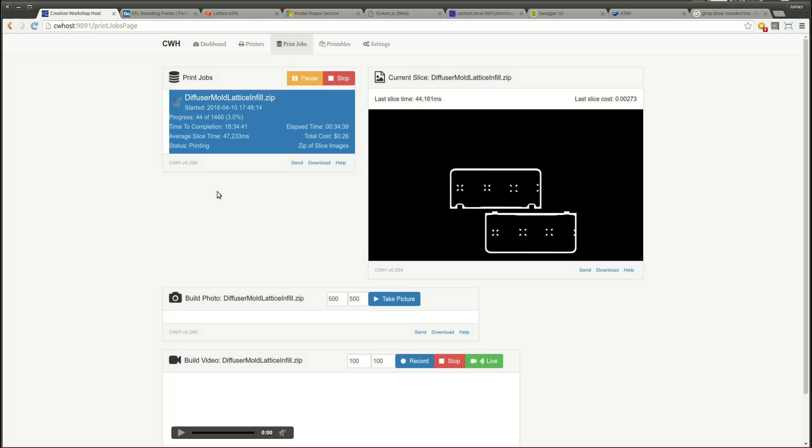I've got prototype molds printing on my Kudo3D Titan 1 being controlled by Photonic3D, formerly known as Creation Workshop Host. That's going on right now, but what I really want to show you today is the process by which we take a set of models, for instance this mold here, and we get it ready to print using Photonic3D.

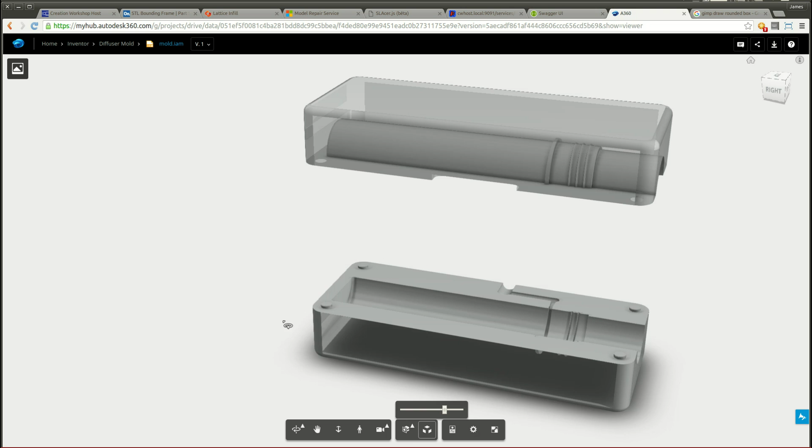So let's start. We've got this model, right? And I modeled this in Autodesk Inventor. You could have modeled this any number of different ways. And this is a two-part mold. There's a core and a cavity. And you export each part separately as an STL file.

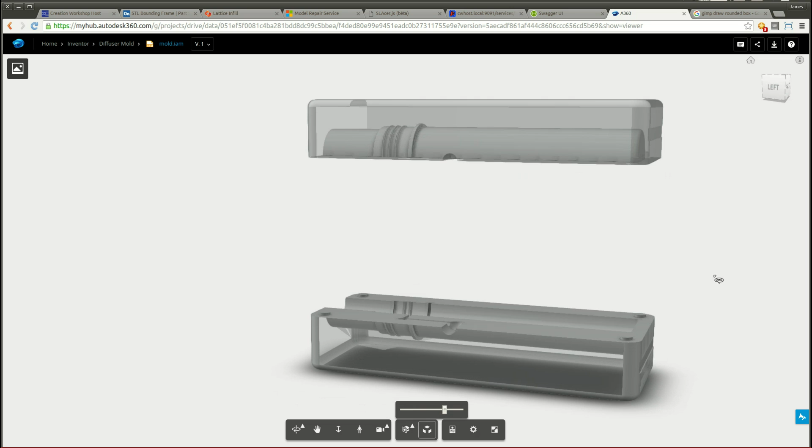Now the big problem when we get into SLA printing, or resin printing, is that we need to hollow out these models, and we've got to put drain holes in them, and then there may be overhangs and things that we have to worry about once we hollow out the model. So how do I do that?

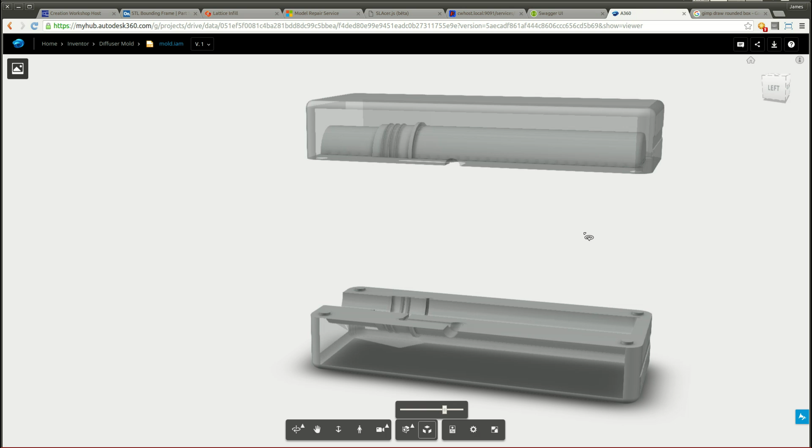Well, the main reason why we want to hollow out and put drain holes in and air holes in is to reduce the surface area so that the model doesn't stick to the vat while we print, and to save some resin. Saving resin should be pretty clear. Same reason on FDM printing we use sparse infill, but the suction forces are important to think about, right?

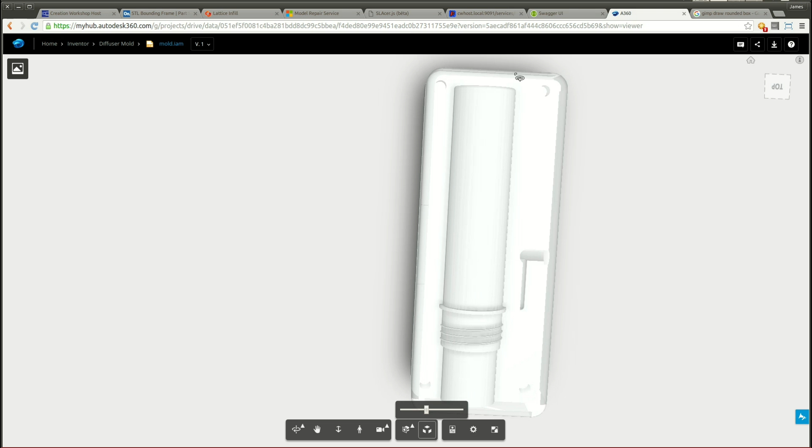I'm going to eventually, when I print, I'm going to be printing with this end here against the build plate, and that means the model is going to be built starting with this part up here, and then layer by layer the build plate will go up and down, right? You can see lots of my other videos that show the build process.

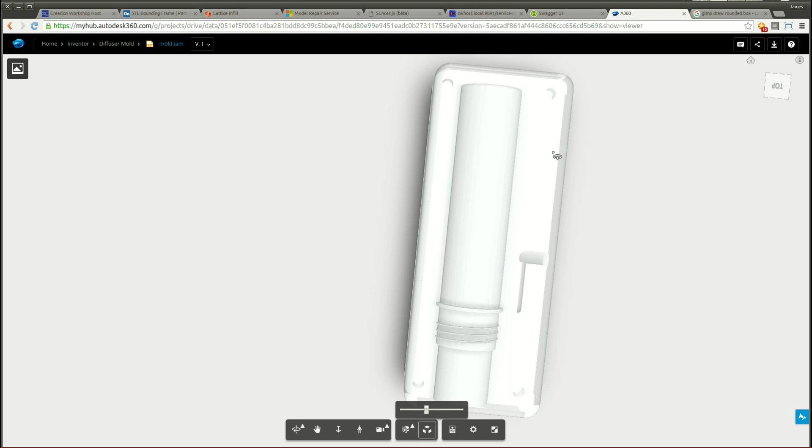Now in the middle of the build process, there is this void on the inside, and besides the stickiness of the resin itself and the solid parts, you also have to worry about this whole void forming kind of like a big suction cup against the bottom of the vat. And that is going to happen if this top part here is solid.

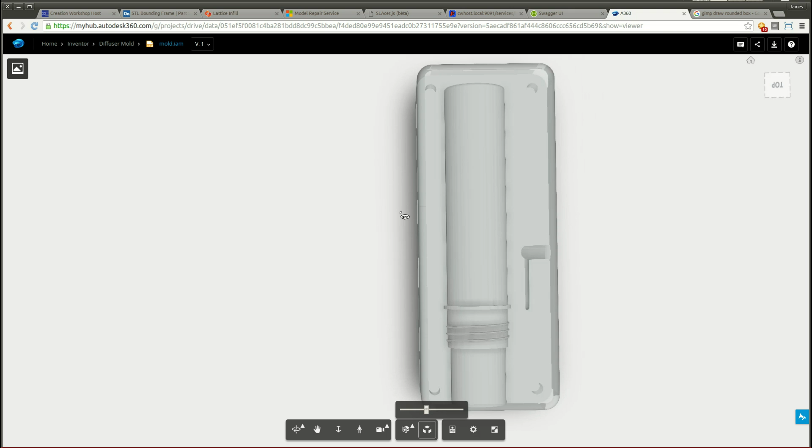So what we need is an air hole so that when this part goes up during printing, there isn't going to be a suction cup effect from the void. And we're going to do that with drain holes and a vent.

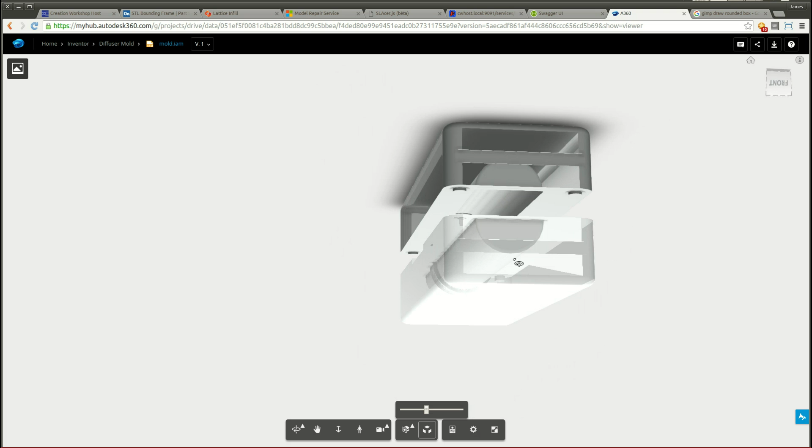And I've had to model the vent into this part already. That's this slice here. And this will create an air channel out the sides, and then I'm going to put holes in here using the infill tool. That way there will be a continuous air path from the interior of the model outside across this bit here.

And then out. So we start with this model, and then we use this Lattice Infill tool that Autodesk has on as one of their experiments.

A few weeks ago, if you've noticed, the buzz was Autodesk had this video and a set of, I think there was a blog article somewhere, talking about how to make prints go super fast on the Autodesk Ember. And one of the ways they make prints go super fast is to...

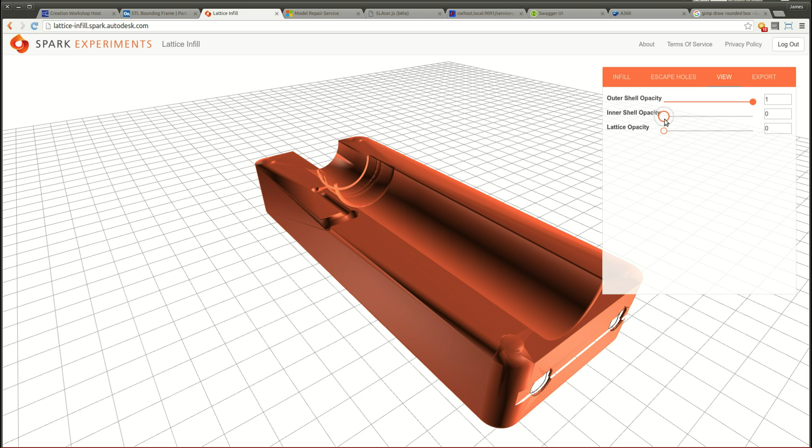...sparsely fill it, and then take advantage of this tool here to put in holes. So there's drain holes here, and if I increase the lattice opacity, you see that there's a lattice on the inside. So I use this tool here, which is web-based, in order to produce this part.

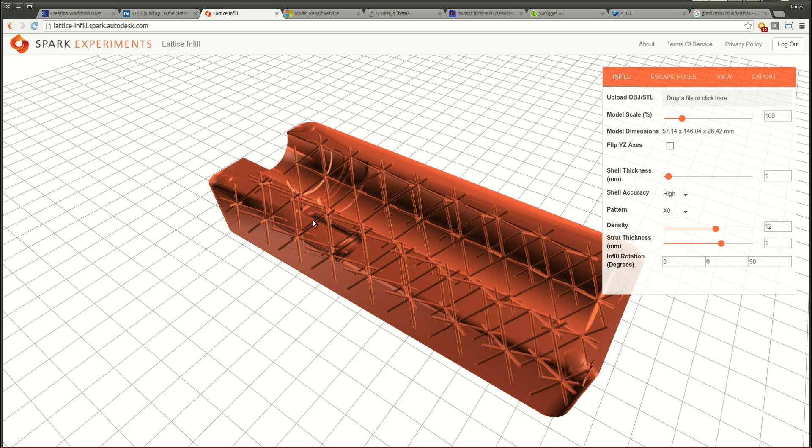Now, how does this go? Let me refresh this now, take it back to its original state, and then let's go through that process very briefly. Now after refreshing, this brings us into the default settings for Lattice Infill. Now in my case, I don't need a 3mm shell.

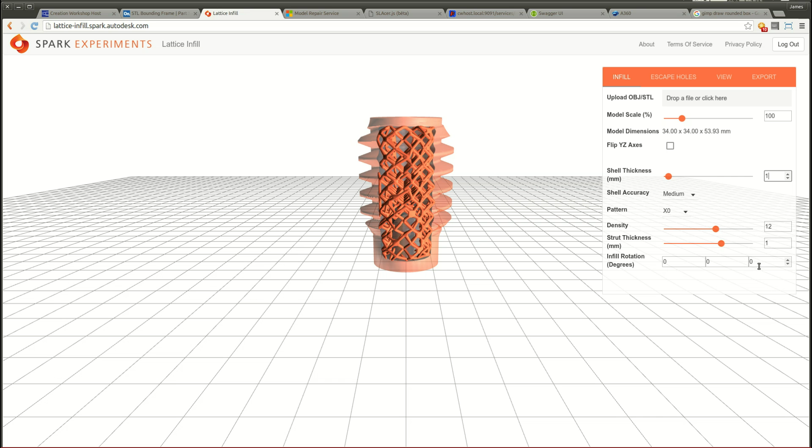I only want a 1mm shell, and I'm going to leave the rest set like this for now. There's this default screw part here, and I'm going to go and pick my own. I'm going to pick this diffuser mold core, load it, and then take a look at how this goes.

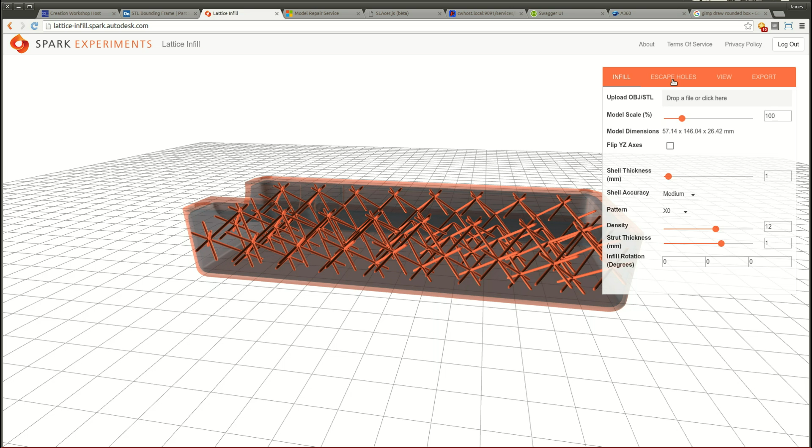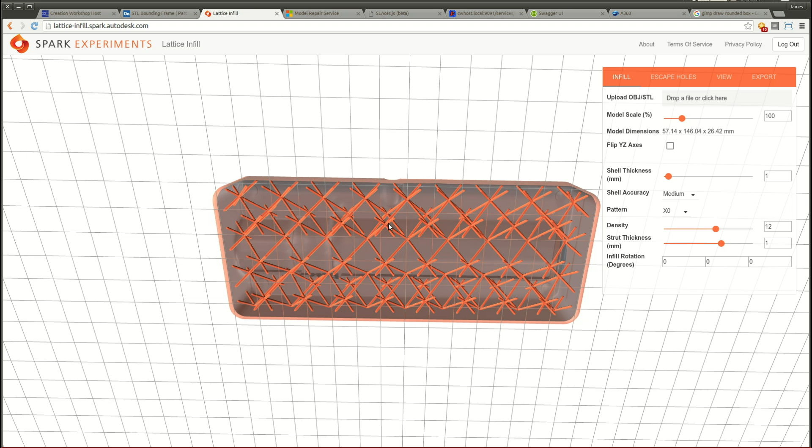Now, the orientation of the part really matters, because this tool only likes to make escape holes against surface planes that are normal to the bottom. And what that means is that it's really hard. In general, I won't easily be able to make drain holes down here, a whole bunch of spots. The tool will complain, just giving an error saying unable to create drain hole.

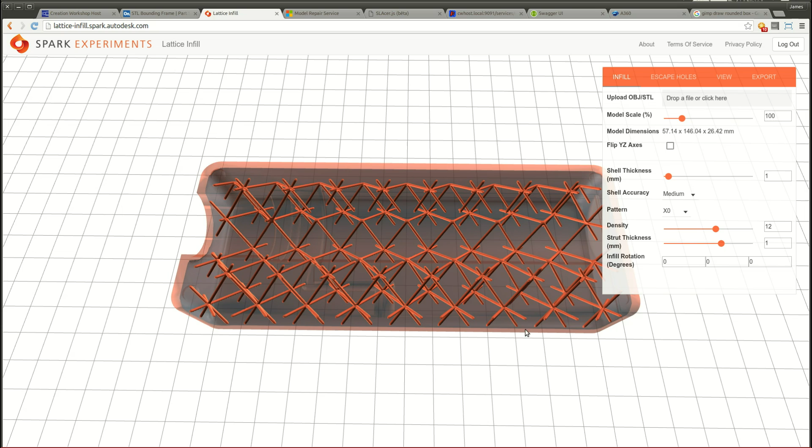You really can only easily create drain holes on the sides in the current version of the product. So I've brought in this model flat, which is the default way that it exported. It does mean, though, that we want to plate this thing afterwards. I'm not going to print it in this orientation against the print bed, but I am going to process it. Because it's oriented this way, the infill may not be optimal for going top down, so I'm going to change the infill rotation a bit, since I'll be printing it upright. Change the infill rotation by 90 degrees, and we're just about set.

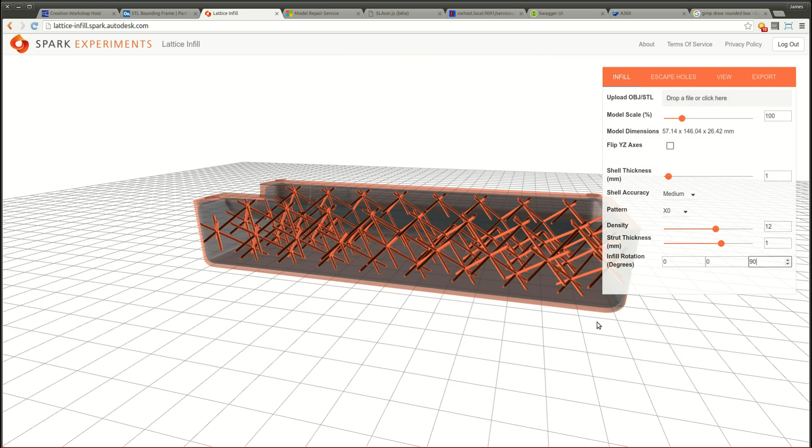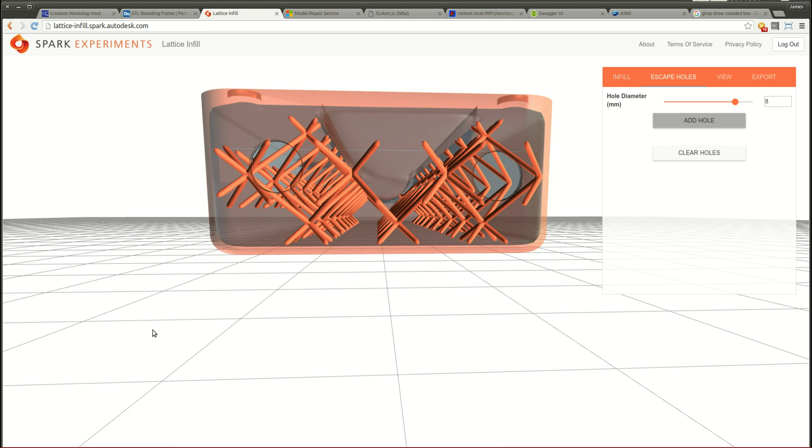The only thing I need to do now is the drain holes. Now remember, if I pull this over to the side here, you'll see there's a cutout here, which was for my air vent. Now I want to put in 2 holes that'll align with those air vents. So I go to escape holes, make my hole diameter 8, and then go add hole. This hole tool conveniently shows me the normal, and I'm going to put one here, and one here. Now these holes overlap with this channel, and that'll create a continuous air channel that goes from the inside out through the holes, and then out through those channels. Now we're set.

I'm going to export this now, export the mesh, and this is going to come out as an OBJ file. The OBJ file that this thing saves could have, and usually does have, non-manifold geometry in it that is going to mess up the slicer.

So I did this on both of the parts, and then I came over to Cloud Netfabb. This is the ever famous cloud version of Netfabb. You can go to cloud.netfabb.com or here, which will redirect you to netfabb.azurewebsites.net. This is a cloud version of Netfabb that only does 3D print fixing. You basically come here, go upload, and select the part, and this thing will take OBJ files. Remember, we imported an STL file, but the Autodesk tool likes exports OBJ files for whatever reason. So we're now in kind of OBJ file land, but that's no problem.

I can come in to where I saved my model and pick up my OBJ file. This is the infill OBJ file that I had, and then I'll upload it, and it'll repair and download. This takes a bit of time, so I've done that already, and we now have the fixed OBJ files downloaded. Once I have the fixed OBJ files downloaded, I then need to lay them out.

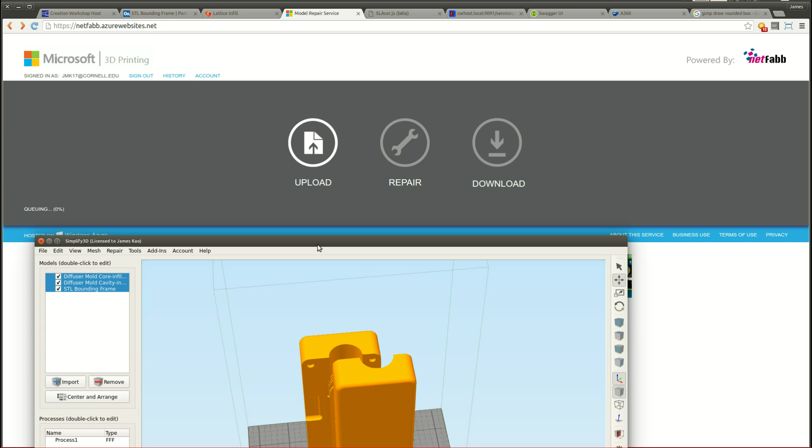You can use a number of different tools for it. Simplify3D is pretty nice, I use that. It is a paid tool, so you can also use Cura, which I'll show you here. Setting this up is relatively simple. You're going to have to add a new machine, and none of these settings matter because we're not actually going to print with this. What really matters is just setting the dimensions of the bed, the X, the Y, and the Z height, so that you know your part will fit, and so you can lay out the part relative to the print bed.

So 168 by 94 by 250, and this corresponds to my current settings approximately. So I am going to load the model, and then I'm going to pick, say, my 2 fixed infills, which are in the form of OBJ files, and then I'll open those, and they'll come in.

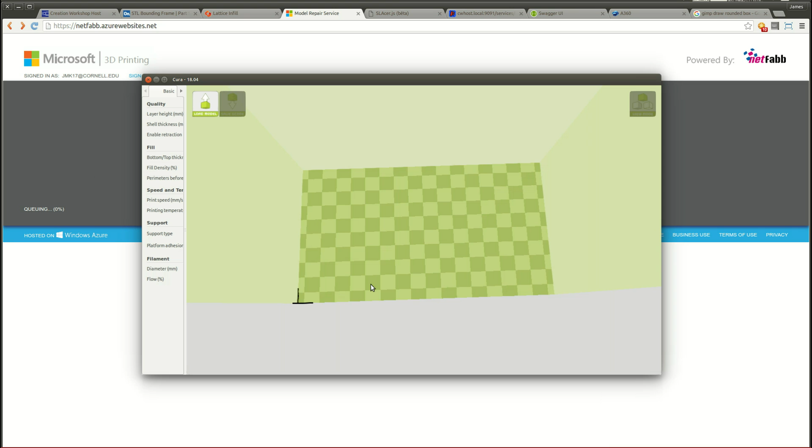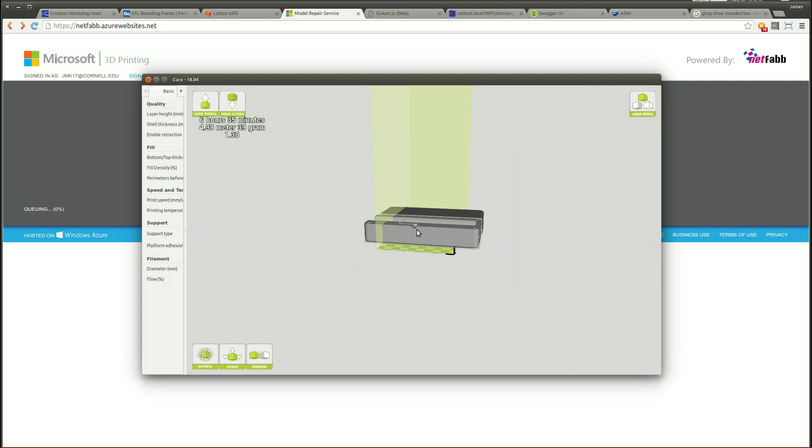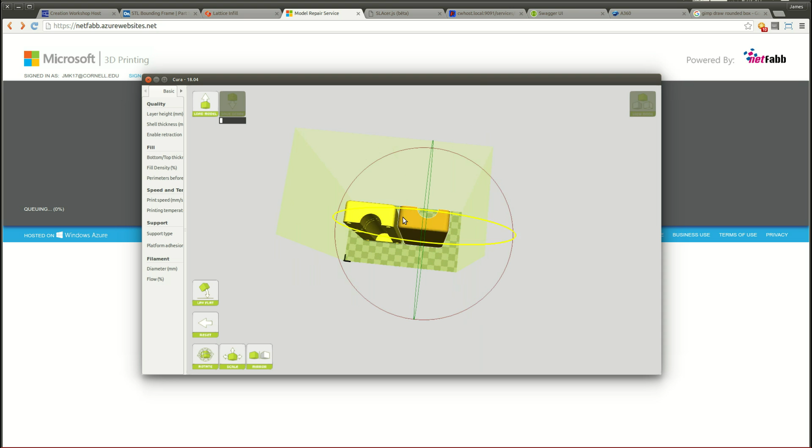Now I'm going to have to edit these, and do a couple of operations. I'm obviously going to have to rotate these in order to line them up properly, because it's not going to be able to print like this. So I'll rotate this guy here 90 degrees, and I'm going to rotate this guy here 90 degrees. And that's good, the holes are at the bottom where I want them, and then I can kind of move them around and they stick to the print bed or whatever.

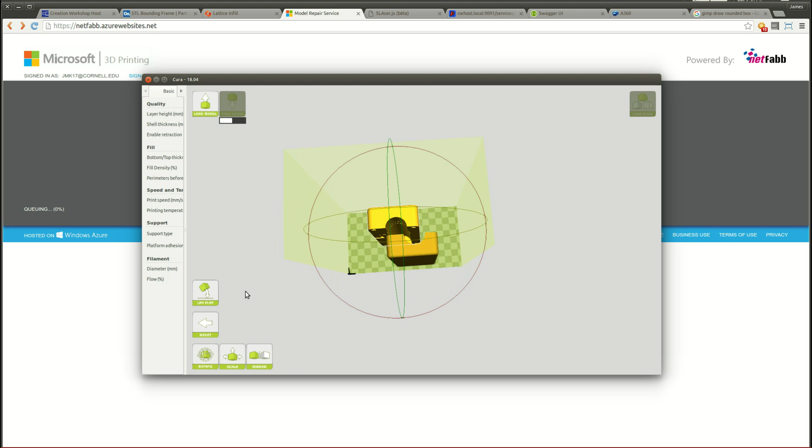But there's going to be an issue. And the issue here is that when I export this bed setup, my positioning isn't going to be saved, in that the model of the bed isn't going to get exported along with this.

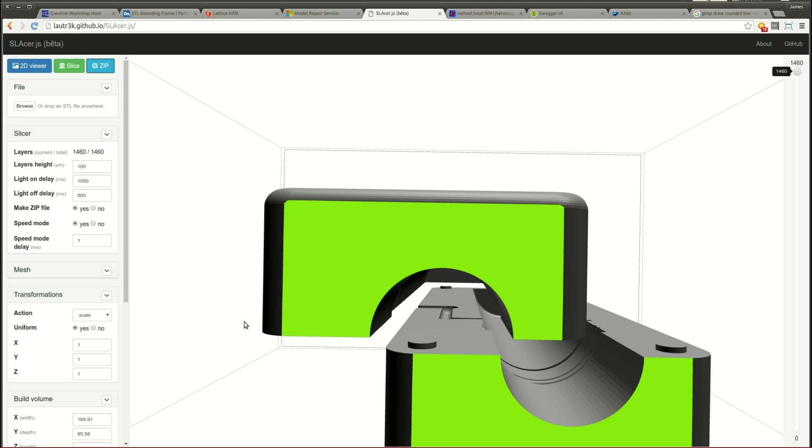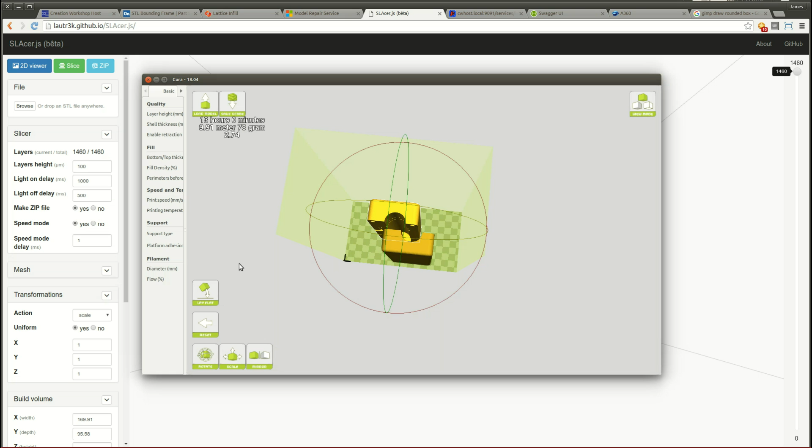That means the center of this whole dimension is what's going to end up getting centered when I take it to SLAcer to slice it later. The slicing tools I'm going to use online don't have the ability to move the XY dimensions or select the XY location or do XY translation of these models. So I'm not going to be able to control exactly where on the print bed this fits. It looks like I've chosen where it sits, but in reality the center of this combined model is going to go to the center of the print bed unless I do something. In this case, I need to make something that's going to frame the dimensions of this print bed so it'll center properly.

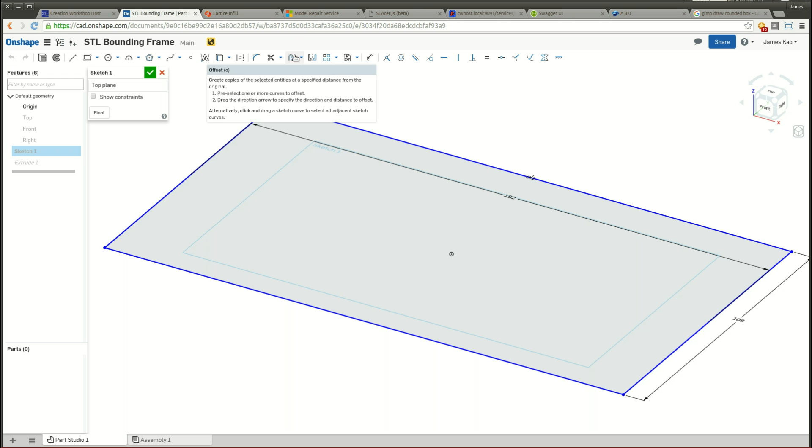That's what this STL bounding frame is. I modeled this very quickly in OnShape, an online tool that's free for non-commercial use. Essentially, I modeled out an object that's the maximum dimensions of my print bed, which in this case is 192 by 108 millimeters because I've got a 1920 by 1080 projector. I modeled out 192 by 108, made a rectangle, and used the offset tool to offset it by a really small amount, 0.5 millimeters. Then I extruded it, only by 0.01 millimeters, only 10 microns.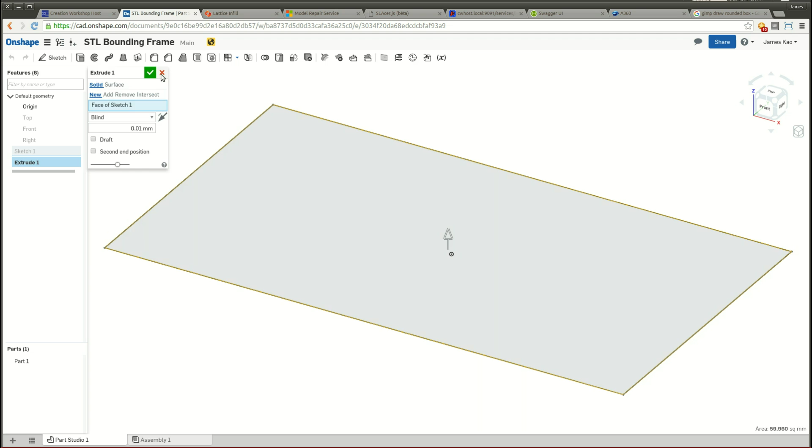What I want here is for this frame to not actually print. I want it to force the slicer to lay things out relative to this largest XY component, but I don't want it to print out. I just need this to bound the dimensions of the exported STL file and properly position the parts relative to the print bed. So this frame kind of represents the print bed, and I need to add it. I exported it - you go export, and then you can export this as an STL file.

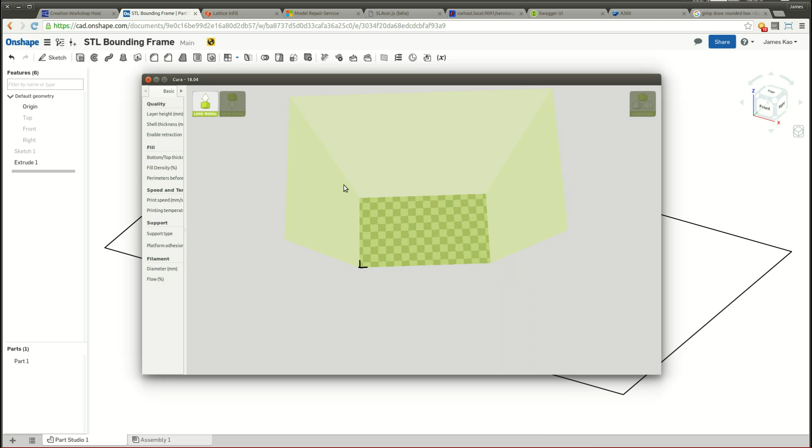Since that STL frame is really tiny, I'm not going to be able to select it easily here. So instead, I'm going to load it first and set it up here, and it's going to be centered by default. You'll notice it's actually outside of the build area, which is totally fine. Next, I'll load my other two models, my fixed OBJ files that came from Netfabb.

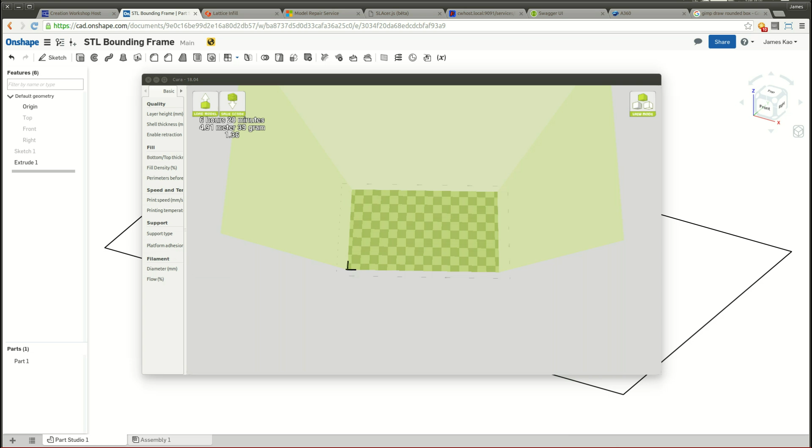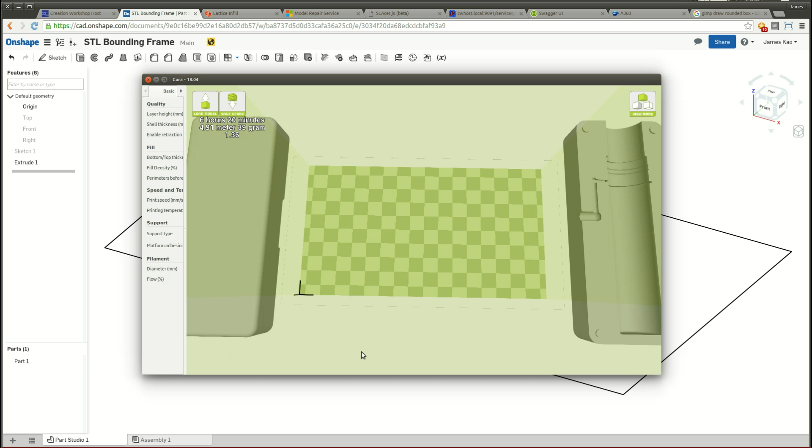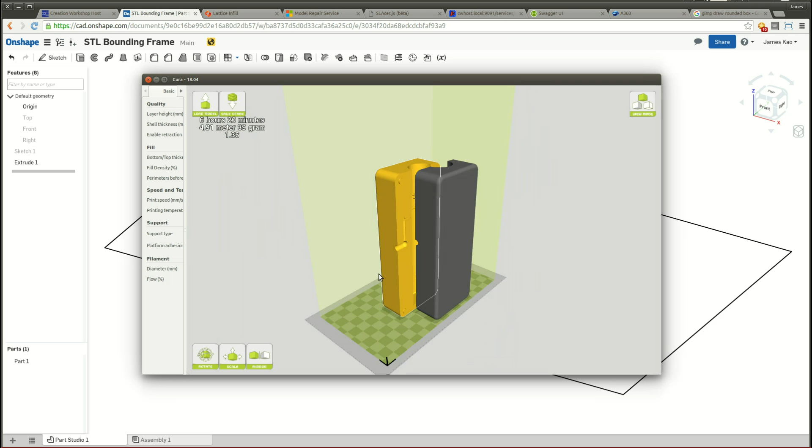Those kind of displaced the original guy, so let me go and reset all object positions, and now these guys go back to some default orientation. I'm not sure what they're resetting it to, but the important thing is it jumped this back to the center. Now I can come and do the rotations to get this guy rotated where I want it to. So now I've got these rotated and laid out where I want them. I've got the drain holes pointing down, the vents pointing down. These guys are placed in the most in-focus and brightest part of my projector.

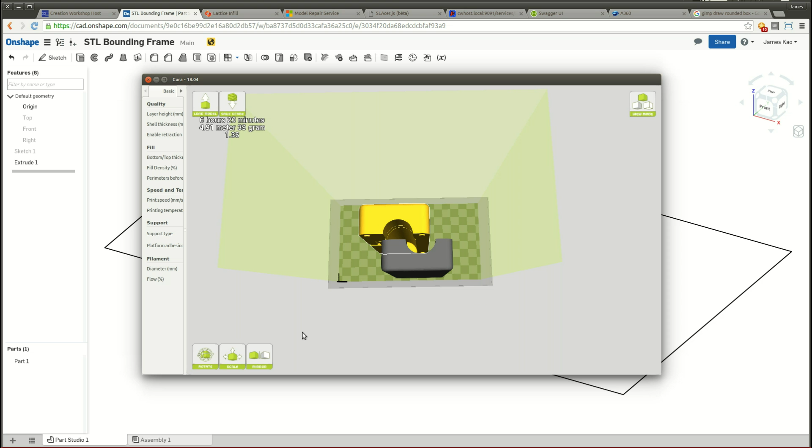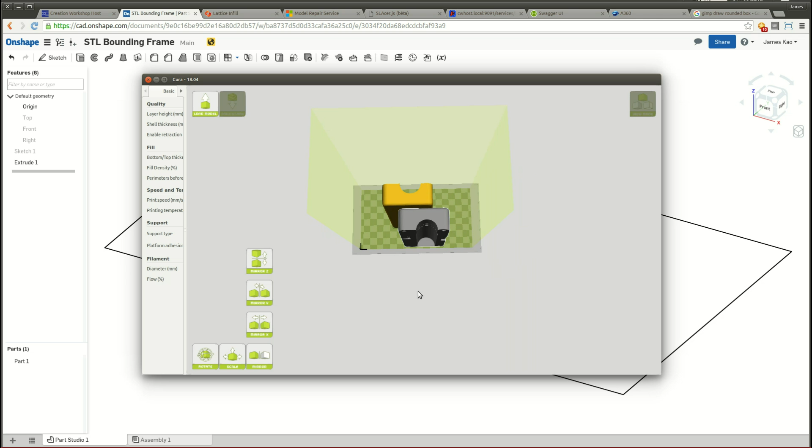Now the last thing I need to do is mirror these parts. You remember in Creation Workshop, you often need to do this, like mirror X-axis, mirror Y-axis if you're doing bottom-up, and we need to do the mirroring also. We're not going to mirror the whole image because we can't do that. Instead, I'm going to mirror the parts individually in 3 dimensions. I'm going to mirror that guy Y, I'm going to mirror this guy Y. That actually changes their orientation.

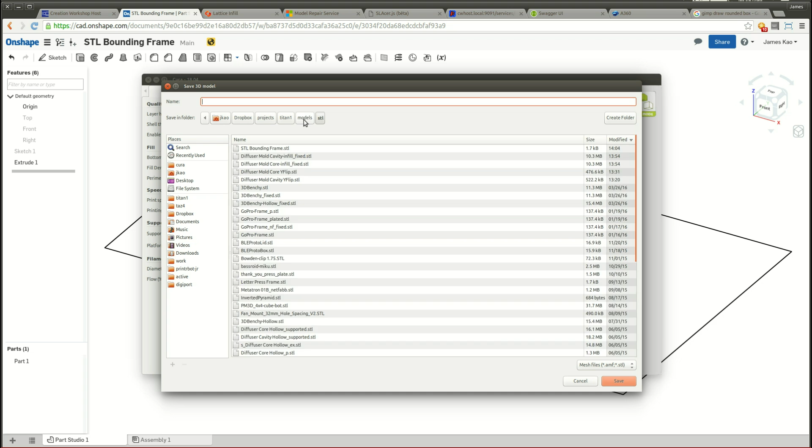So fine, I'll move these around so they get back into their location. I can mess around with this a bit, get it into the location I want, and then save the model. I'll save as - this will be the whole scene, which has got Y flip, it's infilled, and I did it in Cura. So I'll go replace that, that'll save it. If we zoom into the model here, you can see the infill.

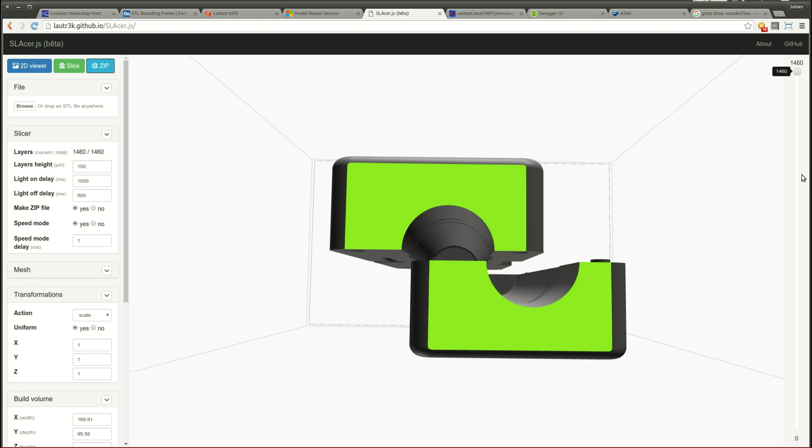So now we've got our scene all set up to slice. We're using SLAcer.js, a pretty cool project that's a pretty fast web tool I'm going to use to slice this scene. You'll notice that when I imported this, these two guys didn't jump to the center - they came in and were correctly aligned. I'll go to Browse and open up the scene that I have, and pull this up - these guys are in the correct location.

Now, there are a couple of parameters that you're going to need in order for this to slice properly. In particular, you need to set the build volume here, because this is going to set the dimensions of your build, right? Which is this inner box here. This outer line here, this is the outside of the frame kind of framing guide, right? The STL bounding box. So that's not going to get reflected. But this here, this inner box is controlled by the build volume.

You need to know what this is so that the image is the correct size, and you're also going to need to get the dot pitch correct. And we've got width, height, but then you've got this mysterious parameter here, diagonal size, that we're going to have to figure out. So how do we figure out what these values are?

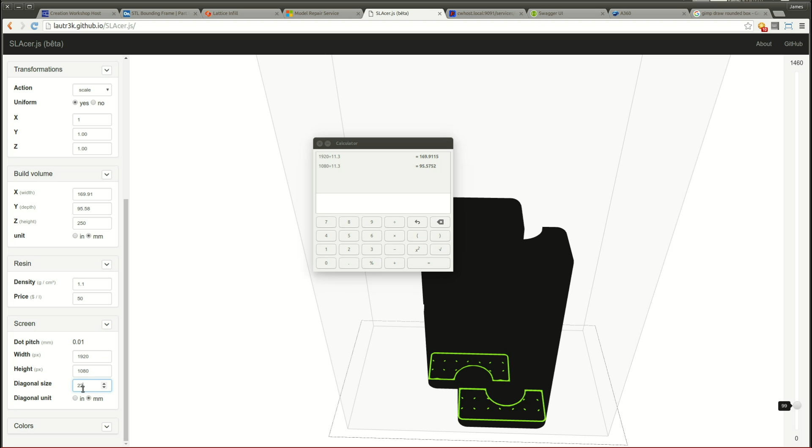So a squared plus b squared equals c squared. We have a and b here, right? We have the two right edges of the triangle here, and so we need to compute the square root of a squared plus b squared. And so we're going to need to go a squared, which is 169 squared, plus b squared, right? And so that's 38,004, and we're going to need to take the square root of this.

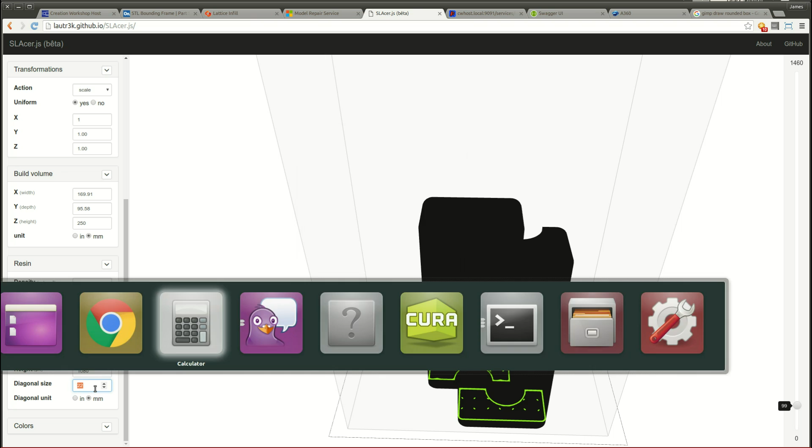So we're going to take the square root of this, and that's 194.9475. And that's what I need to enter here in this diagonal size, which will be 194.95. Whoops. 194.95, right? And that gives me the dot pitch 0.09, because we're only to two significant figures.

You can double check this, because the dot pitch that comes out should be 1 over the pixel density here. If this tool let me, I could have entered it in manually, but essentially this dot pitch is millimeters per pixel, and this value here is pixels per millimeter. And so if I go here and say 1 over 11.3, this is 0.08849, which has rounded up to 0.09 because this only has two significant figures. So this matches up. This is correct.

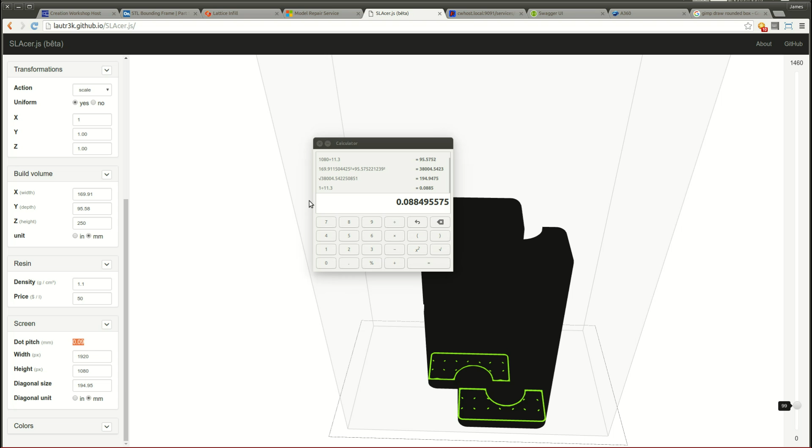So now that I've imported this, it's laid out in the right location. I've got the bounding box, and then when I move this up, I can preview the slices, and I want to make sure that I don't see any really weird slices that contain weird triangles or things that might indicate that I have non-manifold geometry. SLAcer.js does not do geometry fixing, so if you have non-manifold geometry, really weird things are going to happen.

Then we've got to set our standard parameters. We set the layer height here. This is going to be the same layer height that we set for the slicing parameters. In my printer, I've got my slice height set to 0.1 millimeters. That's 100 microns. So I have the layer height set to 100 microns. This light on delay and light off delay do not matter, because what I'm doing is making a zip file.

And then I also want speed mode. Speed mode means I'm just going to render the images to the zip file. It's not going to try to project them. There's another mode where you could have these projected out to a monitor, maybe if you're going to manually enter commands, probably for some future functionality, but that's not what we need. We just want to make a zip file.

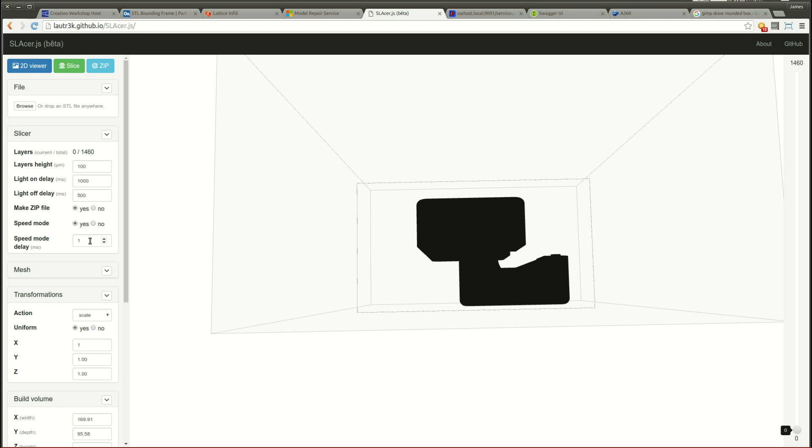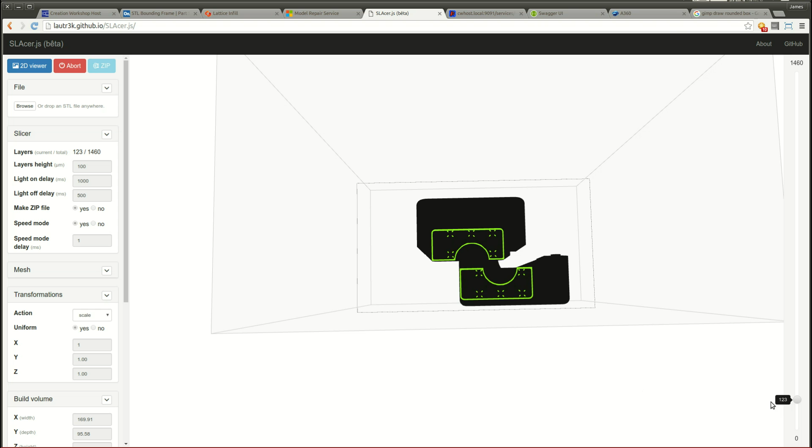So we're going to do this, and then I'm going to slice. You'll see that this slice is pretty fast. Not fast enough that I'm going to force you to sit through all of this, since this is 1,460 layers, but this is pretty speedy slicing, especially since this is done right inside of your browser. I didn't need to download any software for this. Now this is done. We've sliced the whole thing.

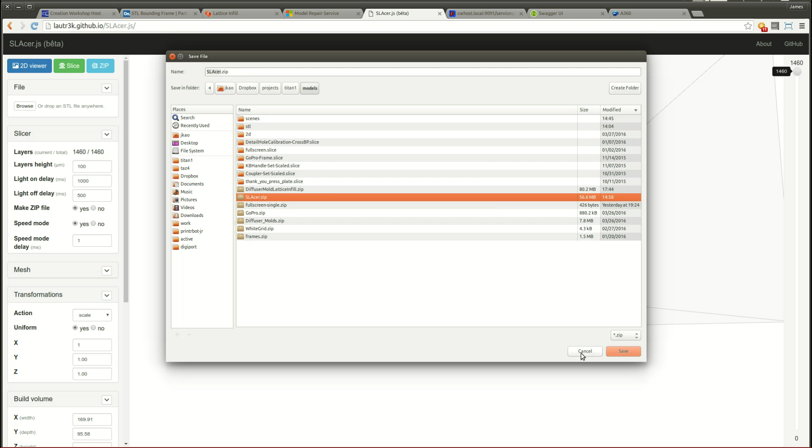Now we need to download the zip file that contains the slices. So we'll click on this zip button, and it'll compute the zip, and then we'll save it here. The real one here is diffuser mold lattice infill, the original one. I'll use the scrap name here, SLAcer.zip, the default, overwrite it, and then let's see what is in here. If I open up this zip file,

we've got a folder here with slices. Whether or not it's a folder doesn't matter. The slice PNG processor in Photonic3D doesn't care whether or not your PNGs are in folders. It looks for all the PNGs that are in the zip file. And then we've got our slices here, 1 through whatever.

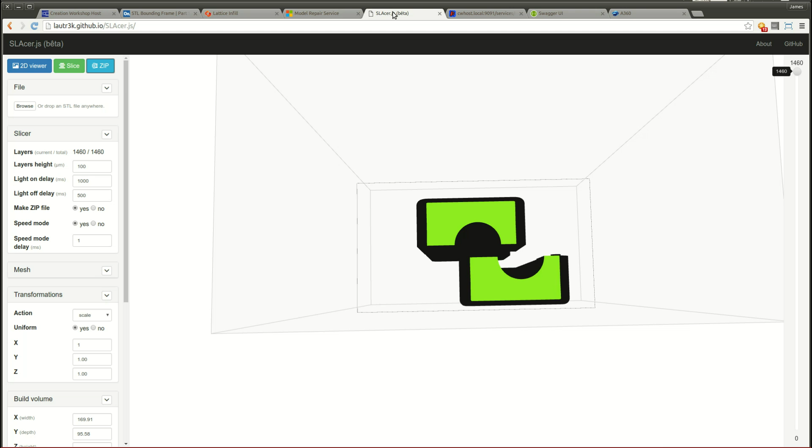You'll notice that these are not zero padded, and that is okay. The zip of slices processor in Photonic3D will do the correct thing when it sees these numbers. So whether your slices are padded or not doesn't make any difference. Let's take a look at one of these slices.

We've got one.png here, and you can see here that I've got a slice, and then I can close that, work my way down to maybe the last one. We go to 1460, and we can see here 1460 contains the slice at the top.

If I really wanted to preview through all of these, I could extract the zip file and take a look, but I do sometimes want to make edits to, in particular, layer 1. It may be that I want to manually add in some additional attachment, and I can do that.

Let me go back to some random directory here. What I can do is I can grab one.png. I can open it with whatever your favorite image editor is. MS Paint works really well here if you're on Windows. I'm using GIMP, which is a little bit overpowered for this purpose,

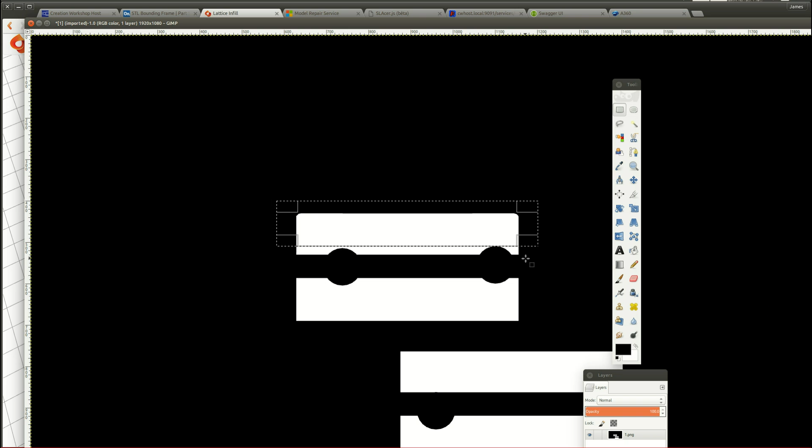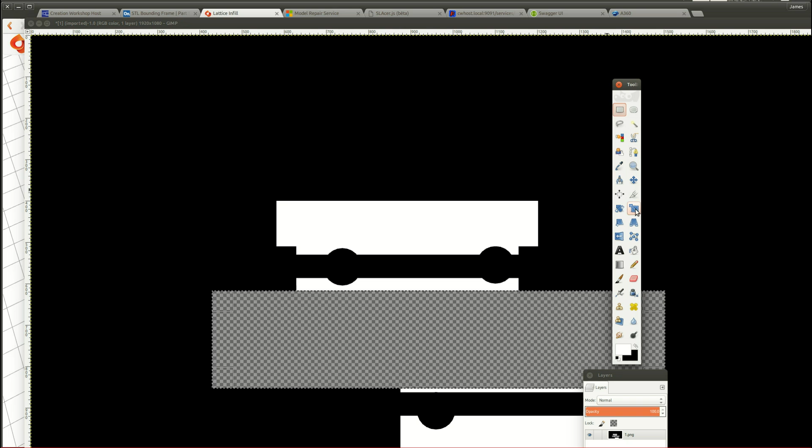because then I have to do things like select this, and then if I want to make this area a little bit bigger, I can do a delete, and then fill this, and then I might want to make this area bigger, like this, and I'll do a delete, and then I'll do a fill. I might do the same for this section down here, which is partially off screen. Delete, and then fill.

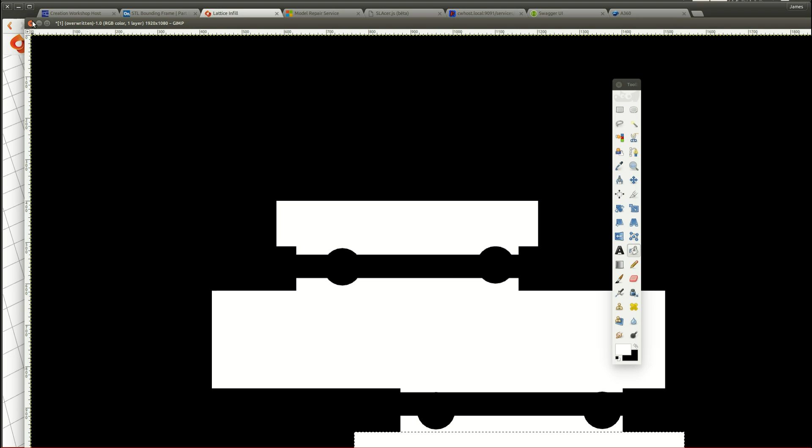There we go. And then the easiest way for me to save this is to just overwrite one.png, and then close this guy down. And then it's going to warn me that I didn't really save it in its native format, and so I'll just discard changes.

And if I come back here, I can actually see in the preview already that these things are already here, and then I can drag this back into the zip file, and then File Roller or your built-in Windows zip file or whatever will replace the file, and then we can upload this.

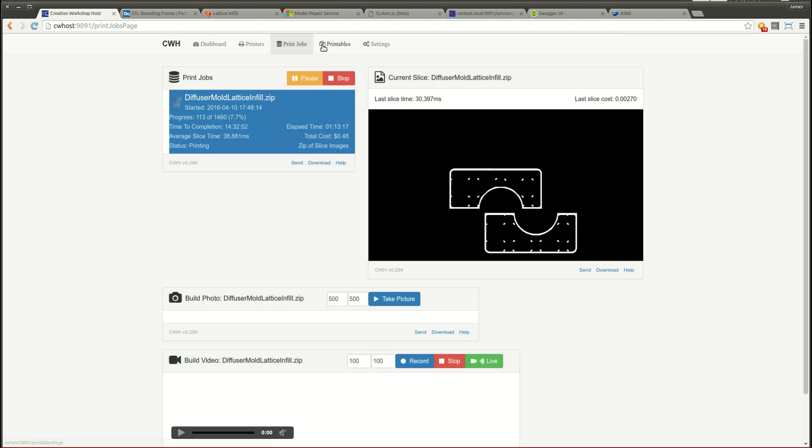When we're ready to upload this, just go over to Creation Workshop host. We'll hit upload, choose file, and here's my SLAcer.zip. And then we'll let this upload in the background, and it'll be ready to print.

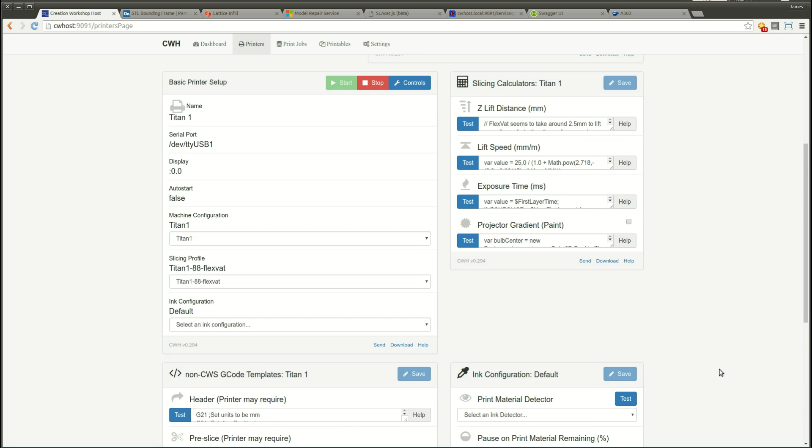Now, of course, we didn't set any layer settings, and you have to do all of that using the default slicing calculators here. And I'm not going to go over these today. There's some good documentation here, and hopefully if you're using a printer like a MUVE 3D or the Titan 1 or the Photocentric printer, some of the team members have created calculators for it.

But you'll need to determine what the Z-lift distance, lift speed, and exposure time are. You set the exposure time for first layers, the number of first layers. This is off by 1, so 0 really means 1. And then the exposure time for the rest of the part. And then you can do all kinds of modifications to them.

So you could put a function here that might linearly ramp down the exposure time from the first layers down to the exposure time over a sequence of 10, 20, 30 layers if you wanted to. Same thing, the lift speed.

Here I've got an S-curve, which you can look at. I've got something overriding it, I've got this guy here overriding it. But anyway, depending on the surface area of the part, this build area in millimeters, it's going to then go faster or slower. Lift distance for the stock Kudo3D Titan 1 will also vary based upon the surface area.

I'm using a homemade flex vat, which I'll make another video about. And with the homemade flex vat, I did some tests, and it seems to take about 2.5 millimeters of lift no matter what the surface area is. So it's just fixed here at 3.